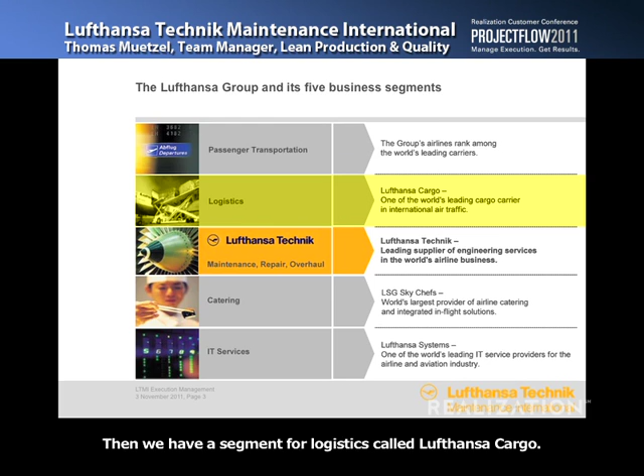As the name implies, Lufthansa Technik is part of the Lufthansa Group, where we have 5 business divisions. Starting with the airline, Deutsche Lufthansa and some partner airlines. Then we have a segment for logistics called Lufthansa Cargo. We have catering, LSG Sky Chefs, and finally IT services called Lufthansa Systems.

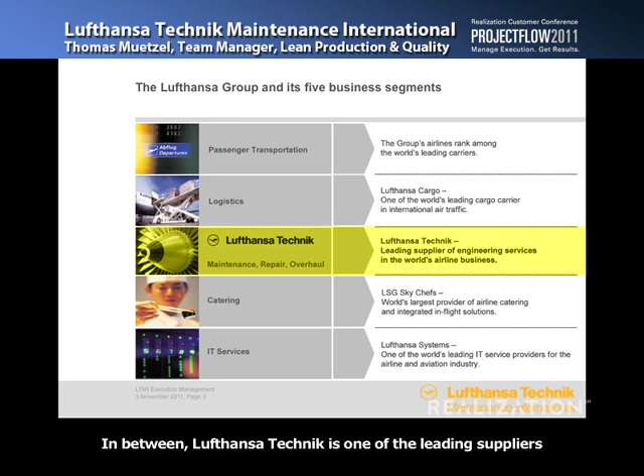In between, Lufthansa Technik is one of the leading suppliers of aircraft maintenance solutions and engineering services, located in Hamburg and Frankfurt. Within Lufthansa Technik we have 6 product divisions: VIP jets, which handle rockstar airplanes, political airplanes and similar; landing gear services; engine services; and aircraft component services.

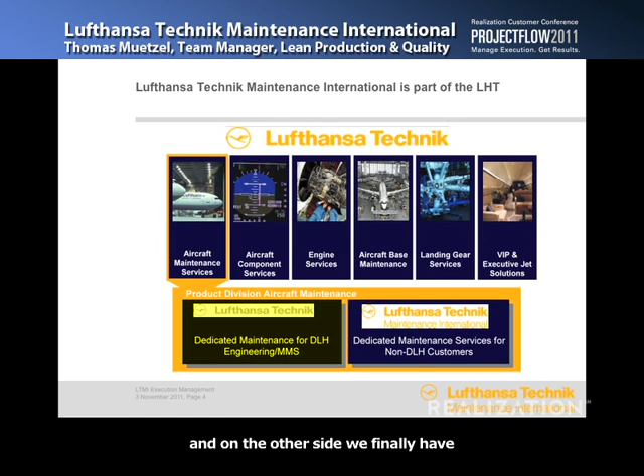They all provide their products to the remaining business divisions of aircraft base maintenance as well as aircraft maintenance services. This is located in Frankfurt and separated into 2 organizations: on one side dedicated maintenance for Deutsche Lufthansa, and on the other side Lufthansa Technik Maintenance International, dedicated to Lufthansa Cargo as well as all non-Lufthansa customers.

The roughly 900 to 1,000 employees of LTMI provide several products. One is the so-called TOM product, Total Operations Management, an integrated management service for companies who build up their own maintenance facilities.

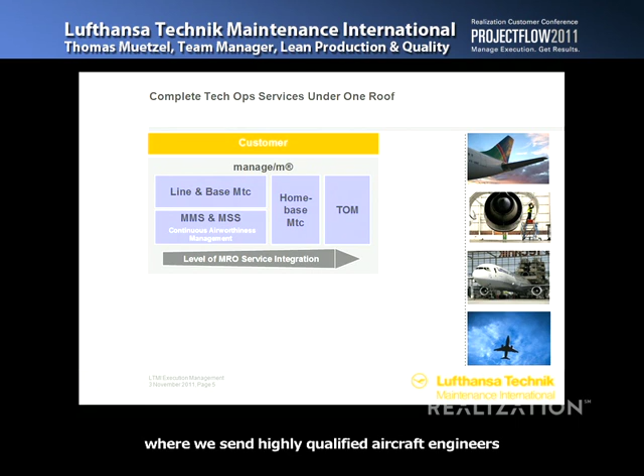It's connected to the next product, home-based maintenance, which usually starts with a personnel assignment where we send highly qualified aircraft engineers to a customer's home base. And of course, we provide an IT solution software toolbox called ManageM that supports companies running a maintenance system.

The core of these 3 products is built up from core elements of aircraft maintenance. One is MMS and MSS services, which is continuous airworthiness management—we set up maintenance schedules, print and write job cards, write engineering orders, everything needed to keep your aircraft in the air and not too long on the ground.

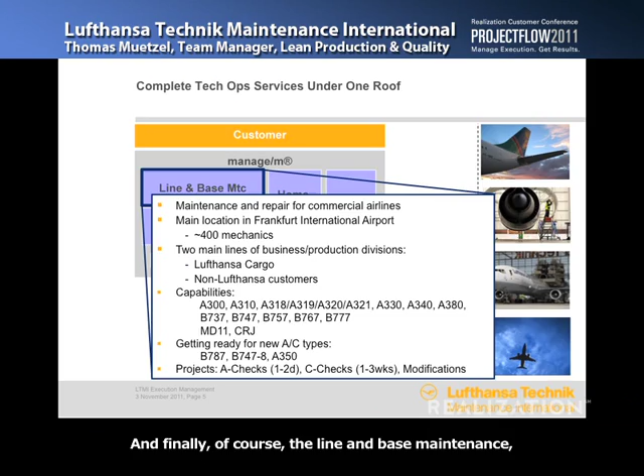And finally, of course, the line and base maintenance, which will be of further interest. It's located in Frankfurt, where we have about 400 mechanics working across 2 separate production divisions.

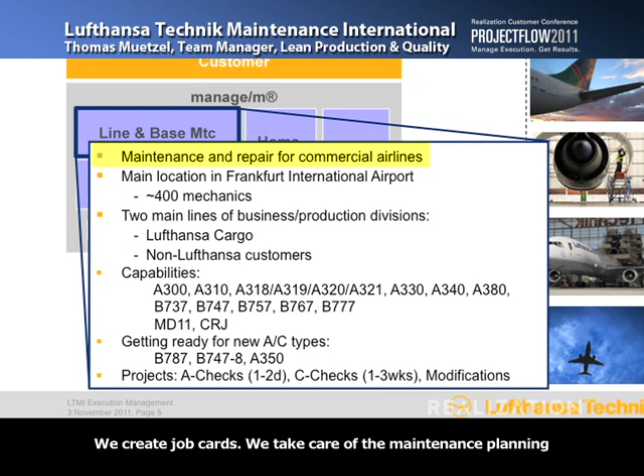One division is dedicated to Lufthansa Cargo, which we consider a highly integrated customer. We run the maintenance schedule, track parts, create job cards, handle maintenance planning and disposition for the whole fleet, and therefore have quite good influence on which kind of work should be done when.

Furthermore, we have non-Lufthansa customers, and they range from highly integrated customers to just one-stop-over customers who come by for just one event, where we don't have much possibility to touch the job cards, the maintenance schedule, or even know which problems the aircraft will bring. We provide these products for a wide range of capabilities, which we mostly built up in the last 3 to 4 years. Before that, we were more concentrated, but I'll come back to this. And of course, we're getting ready for new aircraft types as well: 787, 747-8, and A350.

So where are we running projects in this highly uncertain, variable environment? On so-called A checks, which run 1 to 2, maybe sometimes 3 days, just a few shifts, up to maybe 500 man-hours but not more. We have C checks, which we already learned about this morning. They go over a wider range, starting with 5 days for Lufthansa Cargo, up to 3 or even 4 weeks, which is a more complex project. And of course, we do all kinds of modifications: landing gear changes, engine changes, and so on.

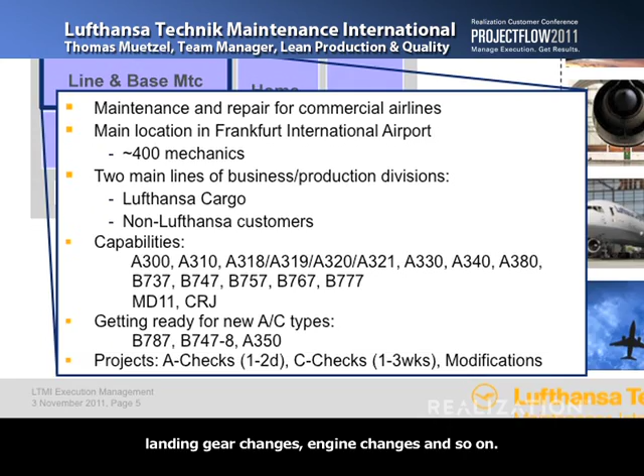So why did we have to change anything at all? Why did we start worrying about how to set up our processes better? Between 2008 and 2009, we lost one highly integrated customer, and of course we wanted to regain the revenue and refill our hangar with work. But we found out the market has no other customer willing to give his whole fleet at the location Frankfurt into our hands. So we had to get into other business, run by business, more aircraft types, and this was only available for a far lower man-hour price than we could achieve with our highly integrated customers.

So we had to find a way to lower our prices, and we tried to do this by increasing the output of our existing capacities. So how did we try to do that? First of all, we had to reorganize our internal processes. We did some value stream designing and went through the whole line of processes, starting with acquisition, the offer, the preparation processes, which is highly important for calm and smooth production, the production itself, after production, and invoicing.

The problem with value stream design, of course, is that it targets something like a static bottleneck, and not, as we learned from Travis yesterday, the moving bottlenecks or constraints we have in projects. Furthermore, you end up pretty quickly, when doing classic lean, implementing takt times or fixed time models for certain process steps. And as we learned in the beginner's workshop yesterday, this can end up adding a lot of safety to the system and therefore creating a lot of waste.

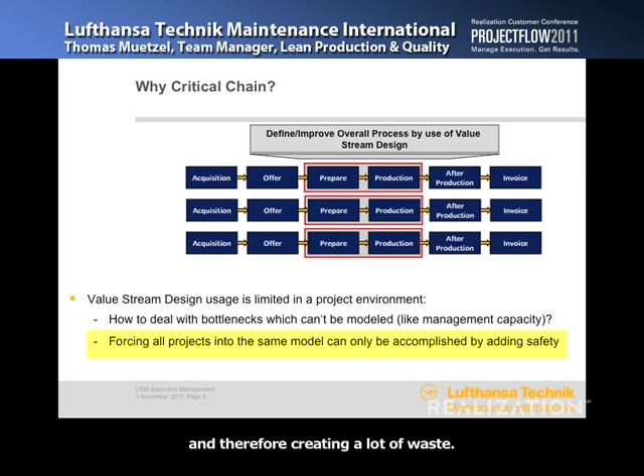So we adapted our value stream design and said, for the planning and steering of projects, we want to implement CCPM as the major idea, the major logic that will drive our projects and help us expose the real constraints, which is mostly management capacity. It's not so much the department head, it's more the C-check coordinators, the work group leads, which are spread thin over the projects, and of course qualified mechanics. These constraints should be exploited, and we try not to further overload them. In the end, we wanted to focus the entire organization on clear priorities, on the real problems we have while running a project.

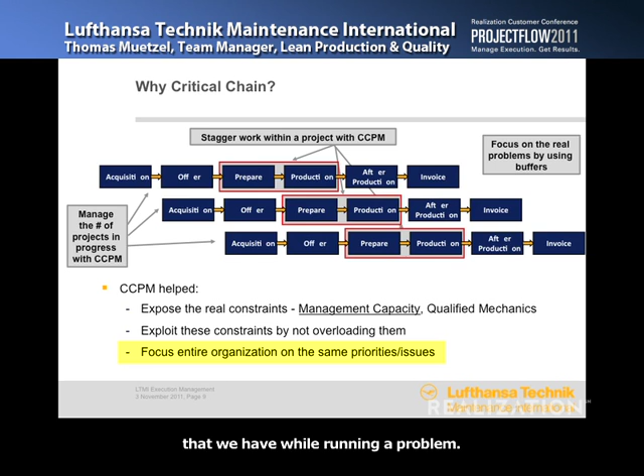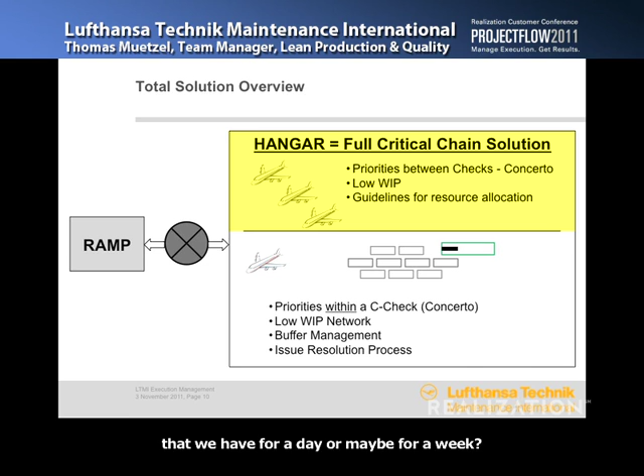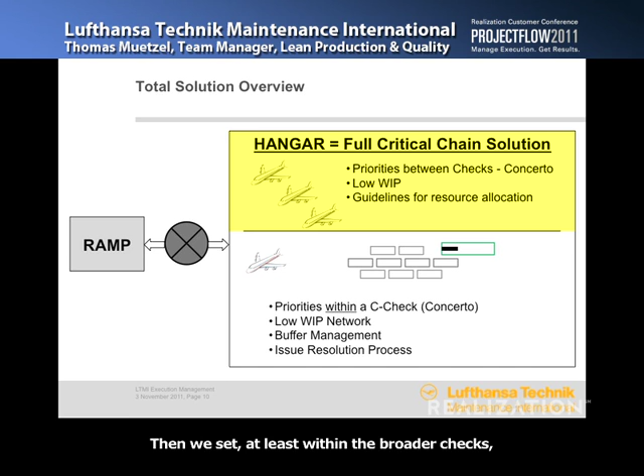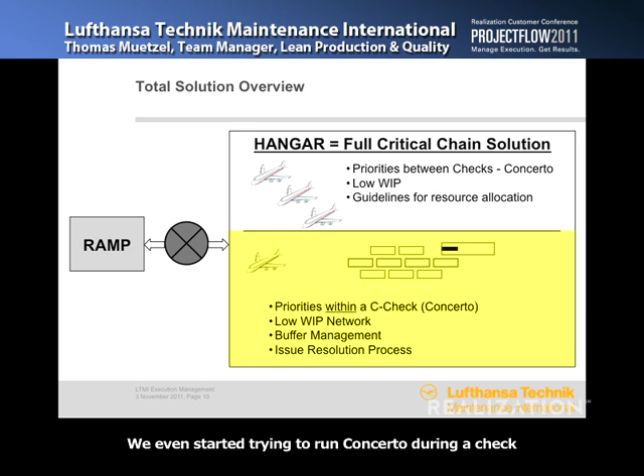So the total solution design was set for 2 different levels of our system. First, we said we want to implement low WIP on something like a hangar level between checks, and get clear priorities on which check is important, where we should put our spare resources for a day or maybe a week. Therefore, we try to implement low WIP as a major rule to allocate our resources. Then we said, at least within the broader checks, we want to implement the CCPM rules as well. So we set up low WIP networks for C checks. We even started trying to run Concerto during a check, get clear ideas about buffer consumption, and therefore find ideas about the real priorities, and feed our issue resolution process.

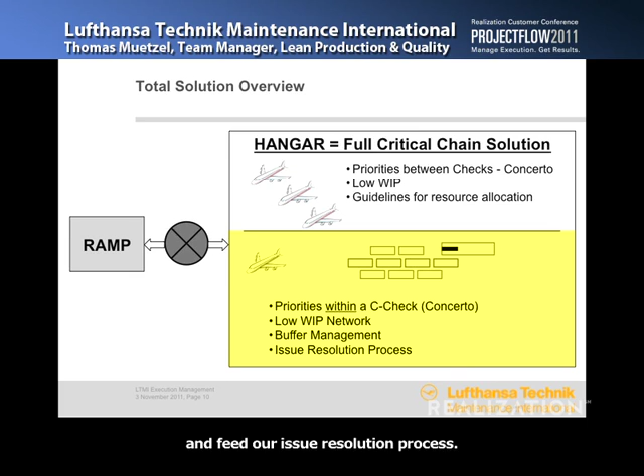Of course, this all just works when I have a closed system, like dedicated personnel that can work under this set of rules. Still, we do some ramp business as well, and as all the MRO guys know, ramp business is always highest priority. Whenever there's an aircraft at the gate with a problem, you take everyone out of the hangar, send them to the aircraft and fix it. It needs to fly away, there are passengers or cargo waiting, and it needs to be carried away. So if we wanted to stabilize our hangar business, we needed something like a safety barrier, a valve that helps us keep the system running under the CCPM rules, and it will most probably be something like a highly qualified personnel pool, shown in that circle over there.

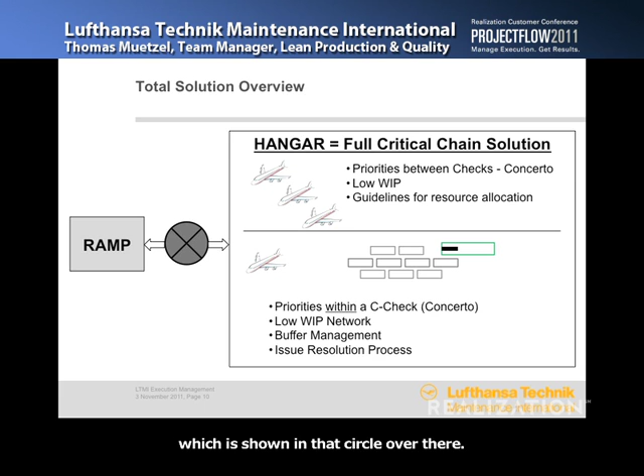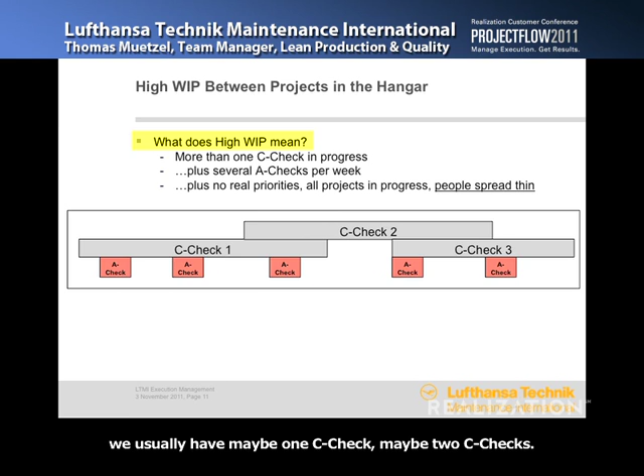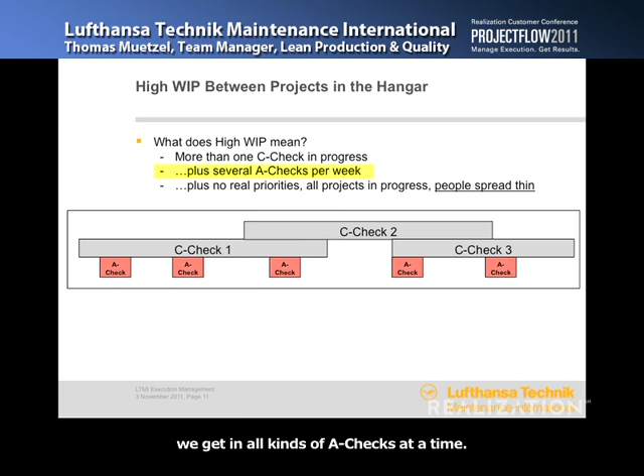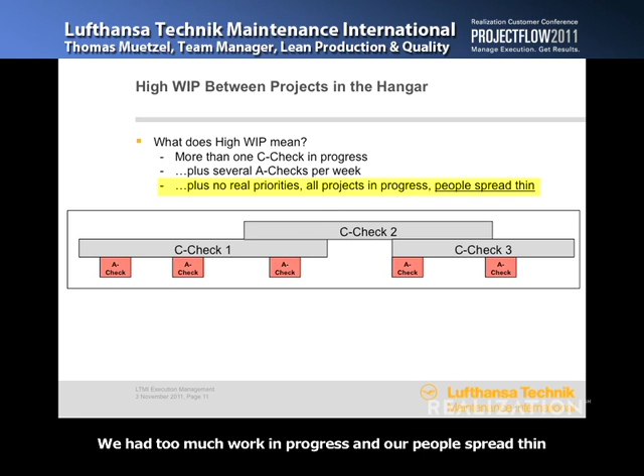To come from theory to more operational stuff, first we had to find out what is actually high WIP for our operations, what is too much for our system. We had a close look and said, in the current system we usually have maybe one C-check, sometimes the next one was already waiting outside. While working on such a big project, we get all kinds of A-checks at a time, 3 or 4 a week, maybe a landing gear change in between. What we saw was people were spread thin, moved around between projects wherever a key account or a loud coordinator said 'here's the highest priority.' So we found out what everyone more or less finds out: we had too much work in progress, and our people spread thin and got really frustrated overall.

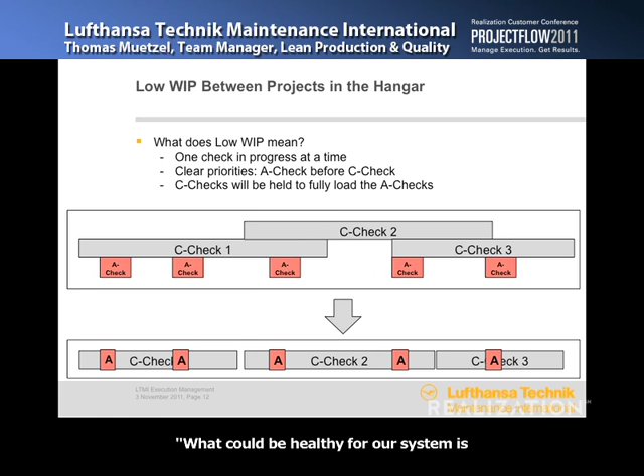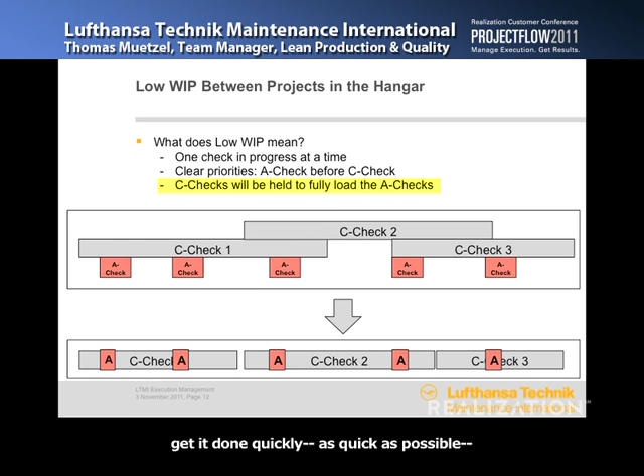So we did some calculations and said what could be healthy for our system is we can actually only allow one C-check at a time, and maybe 2 A-checks parallel to that C-check, or 2 A-checks in one week. So what we're going to do is run the C-check, and whenever an A-check comes in, we put the C-check on full stop, move everyone to the A-check, get it done quickly, and move people back to the C-check. By that, although you can't see it on this graphic, we already gained some time and got things done pretty fast.

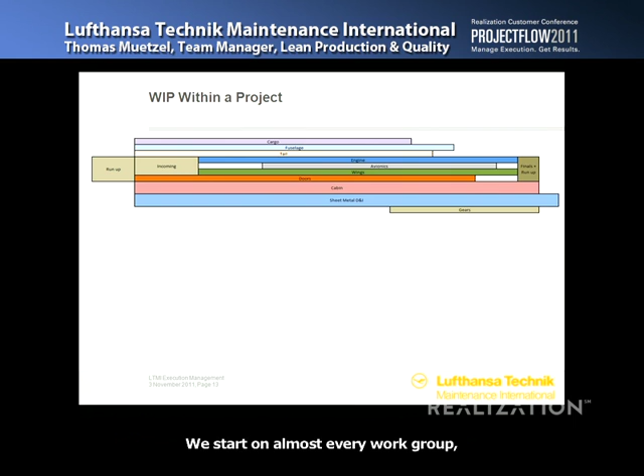But to get the full benefit of CCPM, we said we need to implement the rules for the check itself as well. What you see here is a typical project plan for how we run a maintenance event. We start on almost every work group, doing inspection and repair in parallel, trying to fix issues and get material to the board, get engineers to the aircraft, get everything done at the same time—and of course that doesn't work. We don't have so many qualified engineers or qualified work group leads that you can get things done that way.

Therefore we saw we had a lot of waiting time for our normal mechanics. They weren't standing around all the time, but they used to be waiting for help, trying to find parts, documents, or help to fulfill their tasks. By starting everything at once, we created a lot of waste. What we did else was have a lot of planning going on—we tried to exactly plan every day. And this is, of course, moving all the time as problems occur day by day. Your plan changes every day and you have to replan, get people in, send them back home, get them back in—it's causing a lot of chaos and frustration as well.

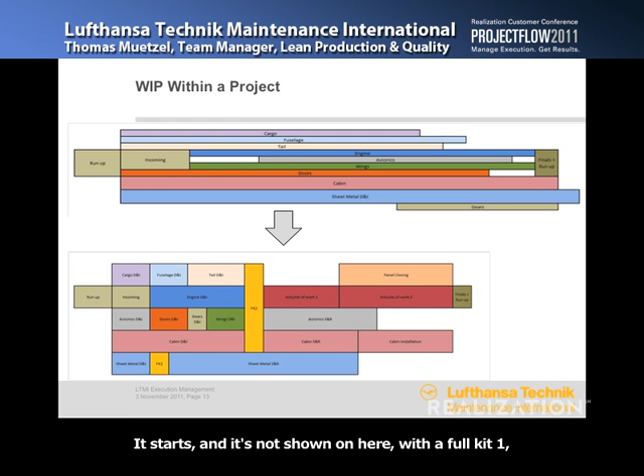So what we did was the same Tetris plan as Daiwa House and tried to set up a low WIP working plan for our C-checks. It starts, not shown here, with a 'full kit 1,' where we try to prepare everything we know is going to happen at the aircraft. We get all the material and documents, and that was an important learning step—that it's important to be well prepared for a check. We didn't have that before.

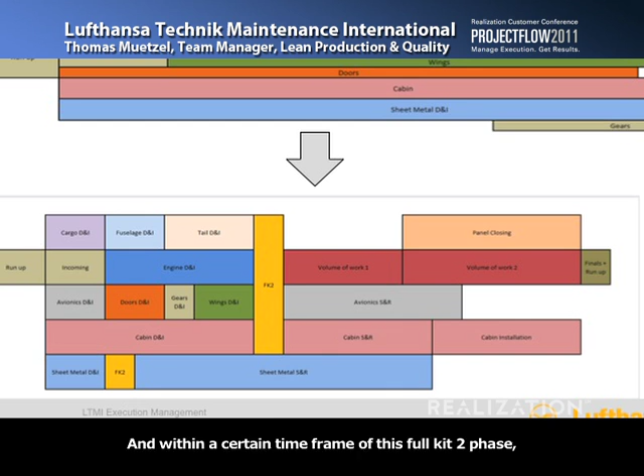Then we said we're going to separate depaneling and inspection, and learn what else should be done at the aircraft to get it back airworthy. In between, we see the yellow one—the 'full kit 2' phase. In this phase, we finally decide how to organize the rest of the check: where should we start, where are the critical items. Within a certain time frame of this full kit 2 phase, maybe half a day, probably not much longer, we try to get all the material we need for the non-routine work found during the depaneling and inspection phase.

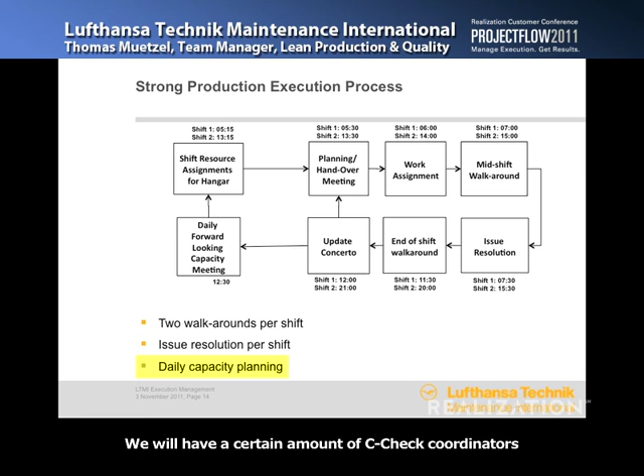So to keep this system running and to force people into a new system of managing a check, we set up a pretty easy meeting and walk-around schedule, which today runs twice a day during the shifts. Furthermore, we decided to plan with stable capacities all over time in every shift. We will have a certain amount of work group leads and C-check coordinators who are dedicated to a check.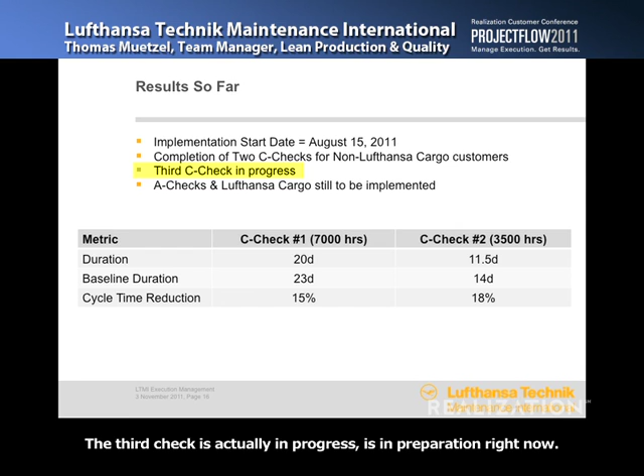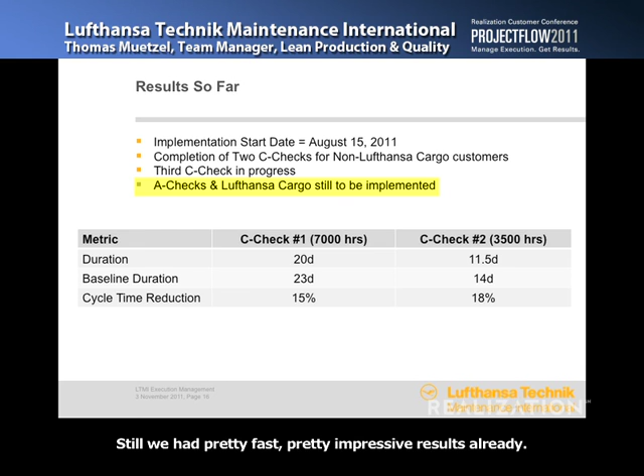So what is the current situation, what did we achieve so far? We only started in mid of August, which is 6 to 7 weeks until now. We completed 2 full C-checks for non-Lufthansa customers. The third check is in progress, in preparation right now. We are still missing a low WIP plan solution for A-checks to put into Concerto, and an idea how to transfer the whole system onto the Lufthansa Cargo production unit. Still, we had pretty impressive results already.

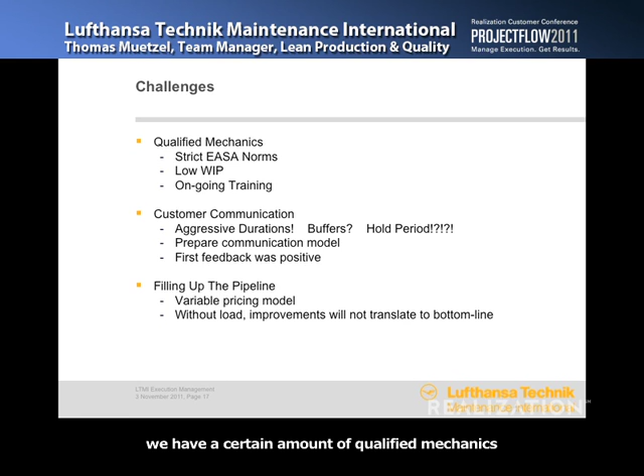So what have been the challenges? Of course, in our European norms, we have a certain amount of qualified mechanics needed for certain tasks in our system, and it's especially hard to keep WIP low for them. Still, we want to train them. So on one side we try to put low WIP on them, on the other side we try to get them out of the system to train them. That's quite a challenge today.

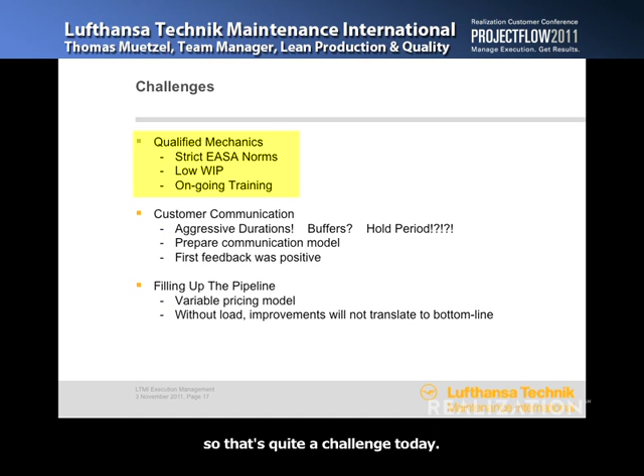Then, of course, we need to communicate to our customer. When you imagine having a C-check and we tell you on the 3rd day now we have a full stop for 1.5 days, you probably go crazy. So we have to find a way to explain in easy words what we're doing, what our new production system is. Still, the first feedback was quite positive.

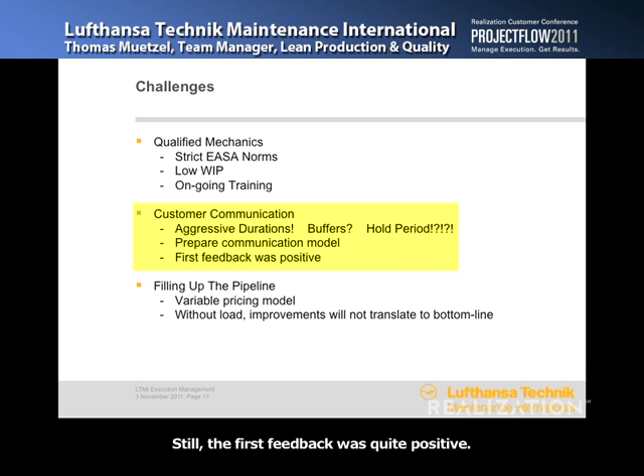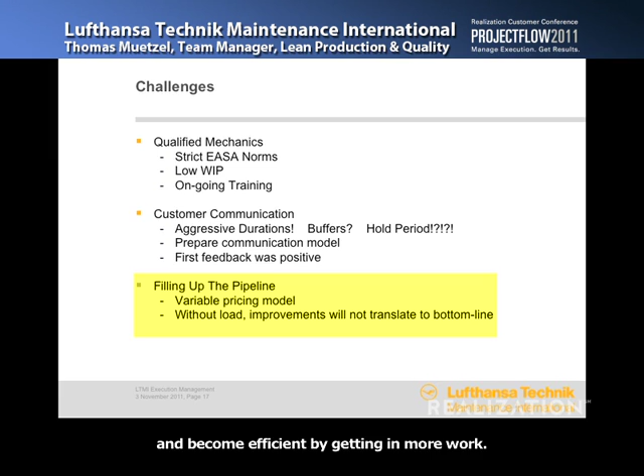And then finally, we need to fill up our pipeline. We need to use a more variable pricing model. We need to understand that we can now create more output, that we can lower our prices and become efficient by getting in more work. Without that further workload, it will be really hard to get an improvement in revenue.

So the lessons learned and next steps. We saw task preparation is highly important, not only in the pre-check phase but as well during the check in the full kit 2 phase, and sometimes ongoing between days. We saw it's really important to keep capacity stable, to not try to steer the system by many kinds of rules but rely on CCPM rules. We also learned forecasting does not really work in an uncertain environment.

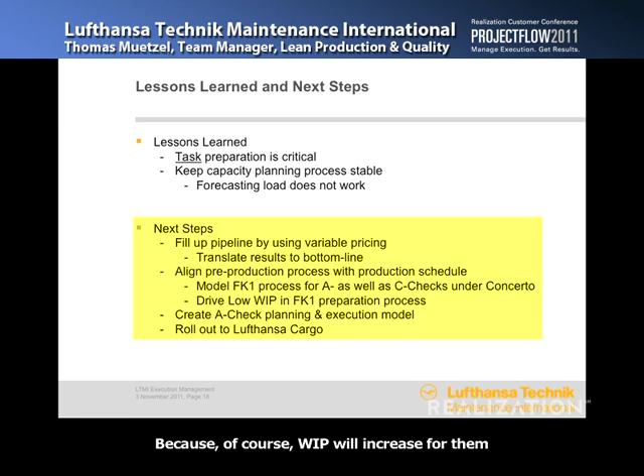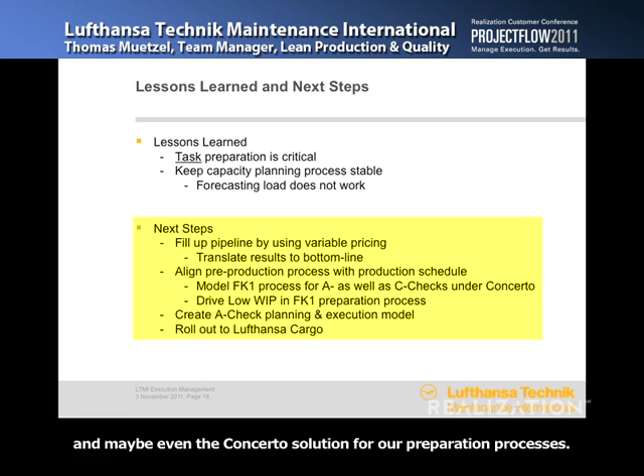The next steps: we need to fill up our pipeline, get in more work. We're pretty confident it will work out. We need to align the pre-production processes, put them on A-checks as well, put a full kit 1 process on for A-checks too, and make sure we don't overload our preparation department. WIP will increase for them when they prepare all these checks coming into the hangar, so we'll probably extend the Concerto solution to our preparation processes. Finally, we want to roll out on Lufthansa Cargo as well.

To sum it up, the initial situation was clear: we had too many planes in progress and not enough time to really prepare, to focus on problems in the hangar or even in preparation, and to have a good issue resolution process. As a result, our mechanics were really poorly used. We did shift surveys and found we just get 30% of their working time at the aircraft, and the rest of the time they were looking for documents, material, tools, or doing other stuff.

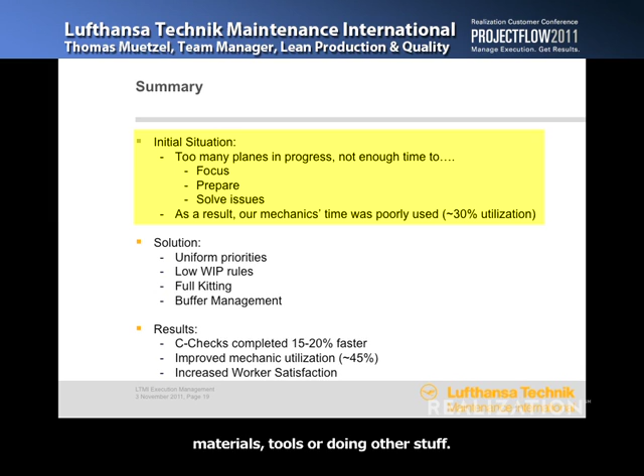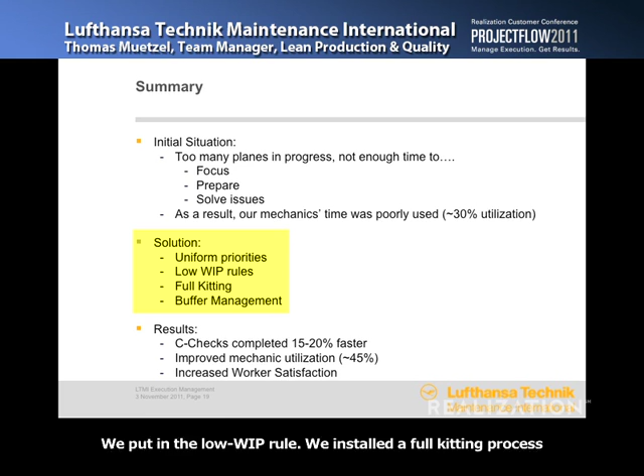Within the solution, we found a way to set up uniform priorities. We put in the low WIP rule, installed a full kitting process, and are now trying to get buffer management running throughout the hangar. The results are already pretty satisfying, but hopefully will get even better.

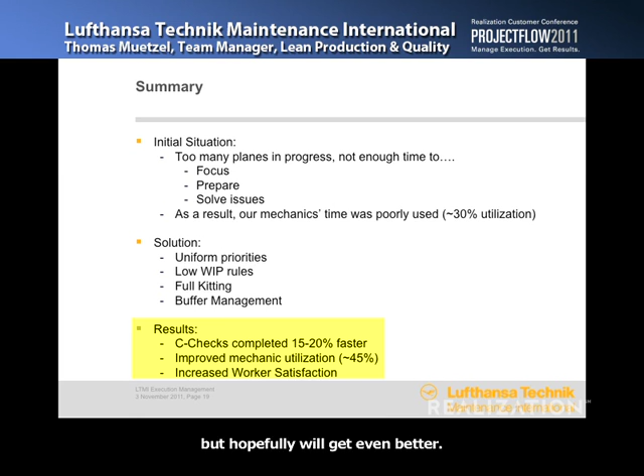So we completed 2 C-checks 15 to 20% faster. We had some A-checks in between this time as well, and they were really good, some even faster. We improved our mechanics utilization up to 45% now, and I guess there's still some air in there we can get.

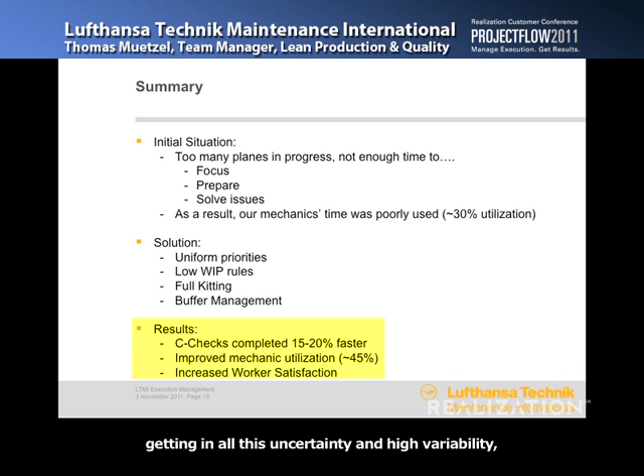Last but not least, and really important especially in our situation after all this change, losing one of our integrated customers, getting in all this uncertainty and high variability, we increased our worker satisfaction. The direct feedback after the first two Concerto or CCPM checks was that people went home and said it was good to work here today. I was happy coming here, and go on with that program.